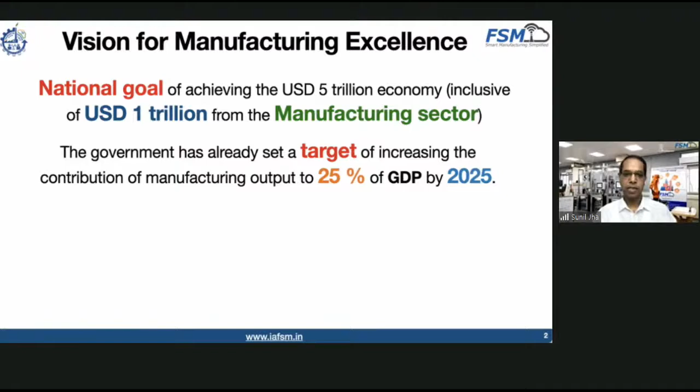Today I will be sharing my thought process on how to prepare technologists for India's smart manufacturing revolution. Before that, I want to give you a quick glimpse of the vision we have for manufacturing excellence. We are looking forward to a $1 trillion USD economy coming through the manufacturing sector, and 25% GDP contribution from manufacturing by 2025. These are some of the visions we have for our country.

We are also looking for India to become a manufacturing hub for the world, and certainly all ministries are working in this direction. There are initiatives by the Department of Heavy Industry to improve the competitiveness of our capital goods sector. We are emphasizing technology development, so that some of the mother technologies can be developed in India. We would like to build up a global value chain, and then skill development as per global standards.

We have already seen a lot of use cases coming out nicely during the pandemic. That's how people got familiar and acquainted with Industry 4.0, and they have already seen the strength and capabilities of remote monitoring, remote access, how facilities become agile, and how they help in changing the product frequently and so on.

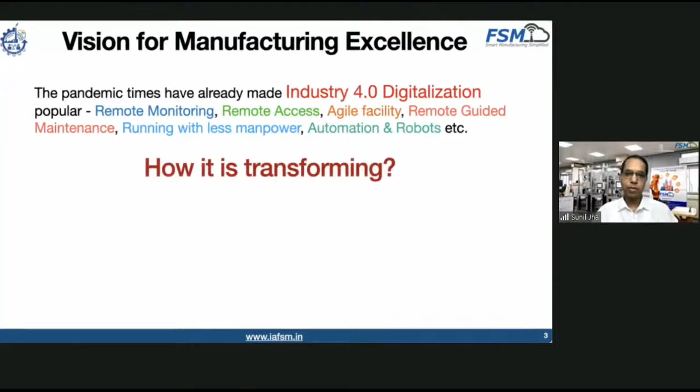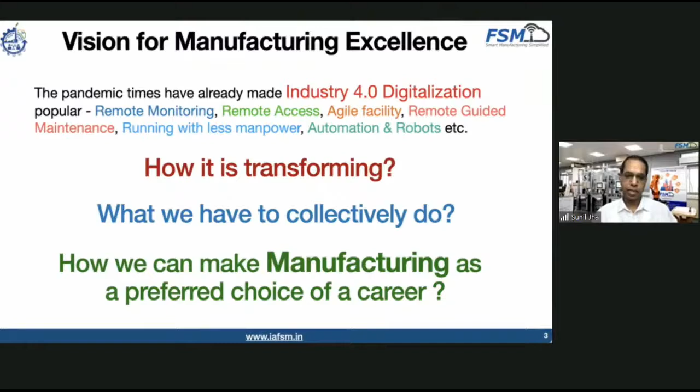Now the question we have today is how it is transforming, and how we are going to contribute towards the transformation happening right now. I want to take you a little back, to when you graduated. We need to see—this is the most important question—how we can make manufacturing a preferred career choice, because we are talking about more technologists contributing towards manufacturing and the kind of vision we have for our country.

Now, since this conference is on the world of technology, we can see that it has no existence without manufacturing. Unless you are able to manufacture something, we will not be able to reap the advantages of technology. But at the same time, we also understand that not many engineers want to opt for a manufacturing career. So I will take you a little back to the way you started learning manufacturing, and then what exactly we need to transform and what kind of reforms we need.

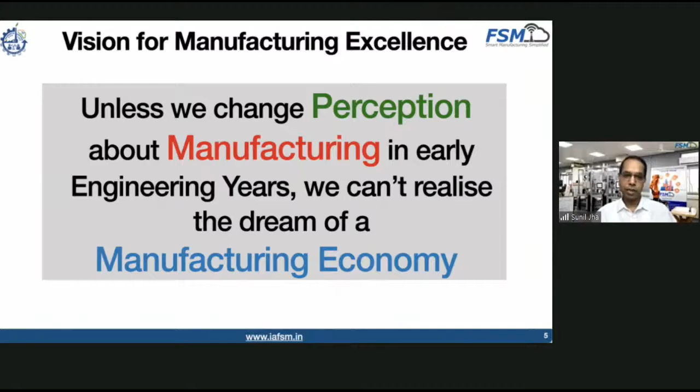Unless we change the perception about manufacturing in the early engineering years—because we all get our first familiarity with manufacturing during our first year of engineering itself—it's very difficult to realize the dreams of a manufacturing economy. So let me take you a little back to where we started our manufacturing understanding journey.

This is the kind of factory in which an engineer got trained, and he got to know about manufacturing processes from these equipments. That's the first interface for all of us, whether as a student, or for me teaching this manufacturing to students for the last 15 years—I think this is something we are using right now. I'm sure you are all familiar with the kind of revolution that has happened over the past. We are using the technologies of Industry 2.0 right now to train engineers to get ready for the revolution we are talking about today.

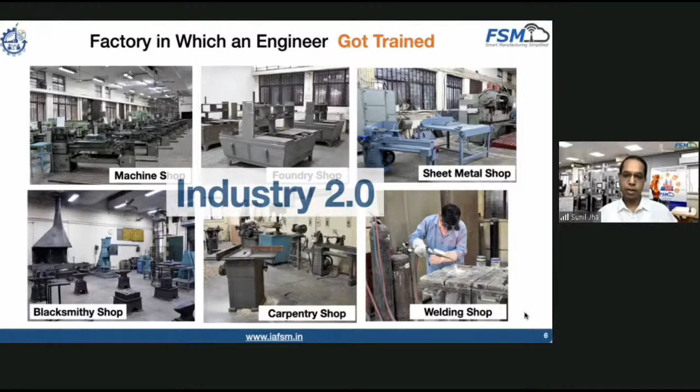So the engineer is supposed to work in this environment. Today, what we are looking forward to, the engineer has to work in this kind of factory—and this is what we are talking about, Industry 4.0. Now, if I am training students on a technology that is Industry 2.0, and we are expecting them to come out and work with technologies relevant for Industry 4.0, I think we need to think about it again.

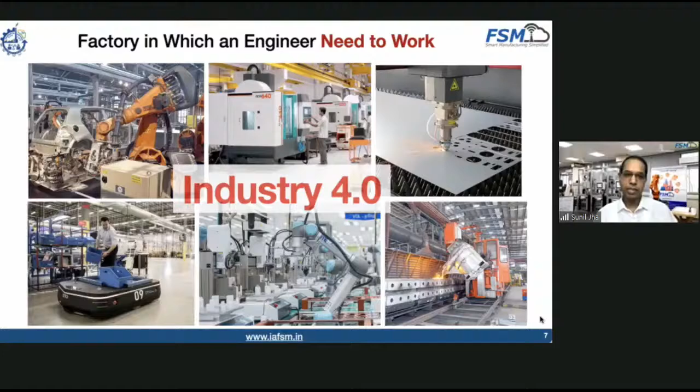So with this, because we are looking forward for manufacturing excellence, we need to do something about this. So that's how we need to redefine manufacturing learning. That's very important. If we are trying to excel in manufacturing, we have to improve the interface for a student, basically how he perceives manufacturing.

From the first year itself, most students have not shown much inclination towards manufacturing activities. That is my experience. Most of the time we heard from students, whether from computer science or electrical engineering, saying why do we need to learn subjects relevant to mechanical engineering? Why is this compulsory learning for all of us?

So this is a very important question to be addressed, because when we're talking about smart manufacturing in the coming years, how can everyone from different disciplines contribute and participate in this revolution?

So here's a quick glimpse of the kind of technologies coming in the domain of manufacturing. This is from a survey done by PwC about digital factories 2020, on how technologies are shaping the future of manufacturing. If you can see, the relevant technologies listed are not primarily falling in the domain of mechanical engineering as such.

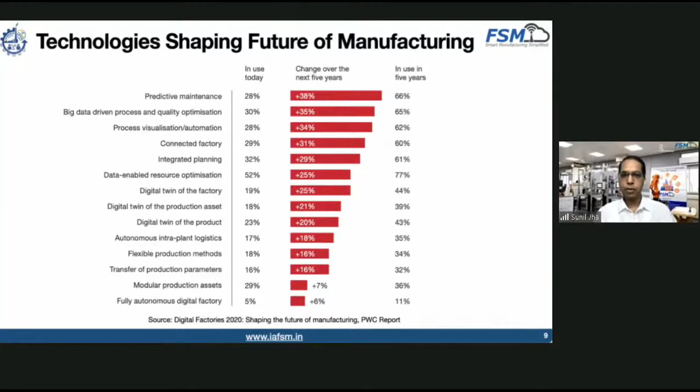So there's a lot of interest to be created among students from different disciplines, so that we can see how these technologies are going to leapfrog in the next 5 years. It's very significant for all of us.

So we are looking forward to the new roles that should be coming out from these new implementations. We are talking about digital enterprises, digital design, digital manufacturing, digital thread, digital products, and the kind of roles coming out are being defined basically.

So with this intent, we started this foundation 3 years back. It's an industry-academia collaboration supported by the Department of Heavy Industry, Government of India. We created this common engineering facility center under a mission from this ministry, the Samarth Udyog, which aims to have more smart advanced manufacturing and transformation hubs set up in the country. We were one of the 4 hubs started in 2017.

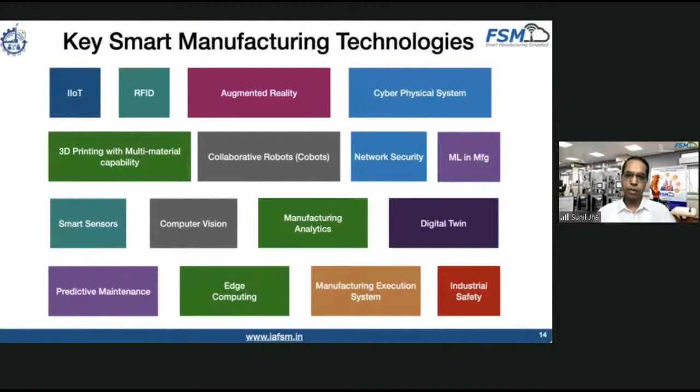Unless students get exposed to these technologies in the early engineering years, they may not come out with a fascination to do something good in manufacturing. So with this intent, we created a small lab, a cyber-physical assembly line. This complete setup has been created in IIT Delhi only.

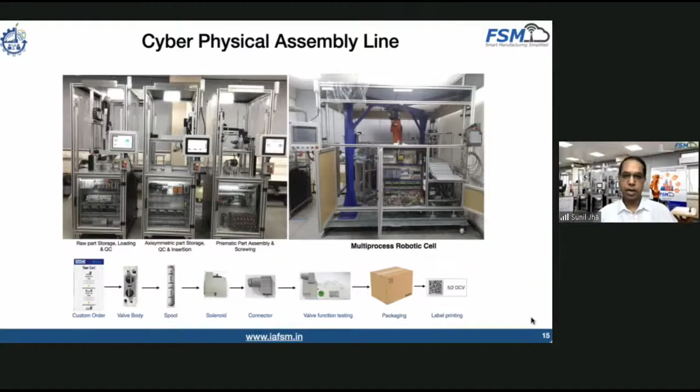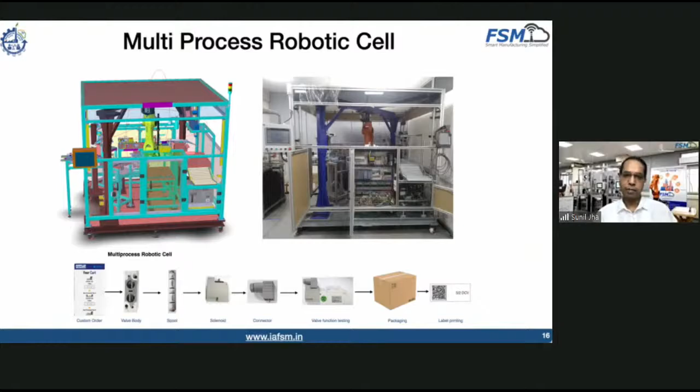We set up an assembly line for an electromechanical valve, which is completely controlled by the cyberspace. We have an app to trigger the order and execute it. We've also supplemented it with a robotic cell, showing how a multi-process robotic cell can perform the complete assembly operation within a small footprint. These are examples created in our lab so students get to know about the state of the art, and can do more experiments and learning on these technologies.

Just in a quick video, I won't run through it in detail due to shortage of time, but I'll give you a quick glimpse of this cell.

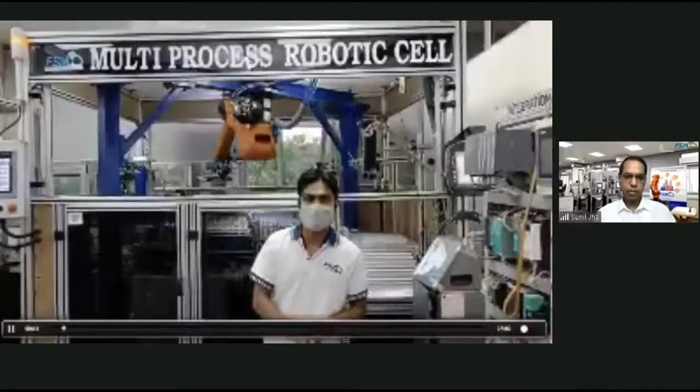Hello everyone, I am Arun, and today I will be explaining this MPRC, that is multi-process robotic cell, which we have created in the lab to get people familiar with robotics technology and how it helps along with automation to do an assembly operation.

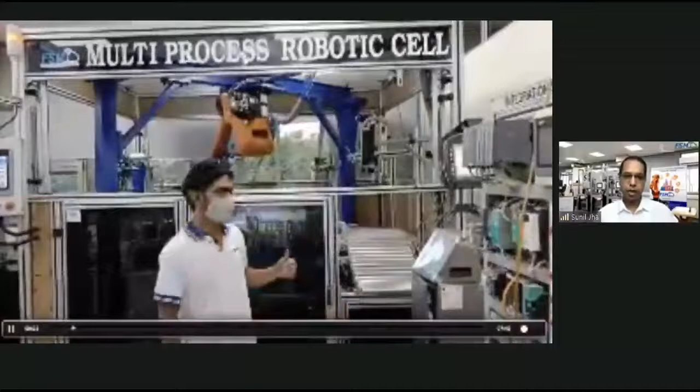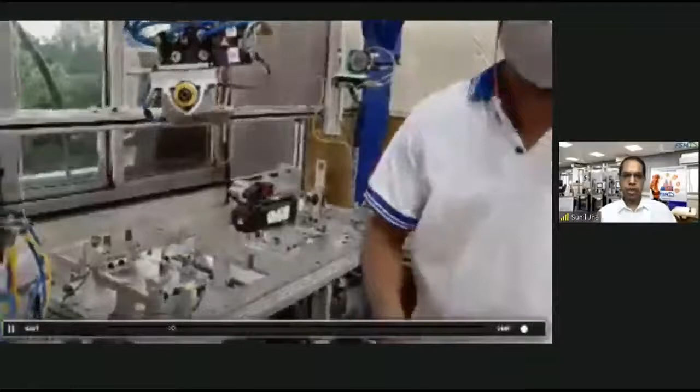The moment you fire an order to this cell, it will start the complete assembly operation. We've shown the interplay of different technologies inside the cell: robotics, automation, packaging, different tool changers, smart sensors, and actuators, how they've been put together to do this assembly operation. This is one of the state-of-the-art facilities we have created here.

I just want to run through a quick demonstration of this. Once the order is picked up or fired by the user, the assembly operations start with the help of the robot at different stations. Finally, the product gets functionally tested, which is a very important part.

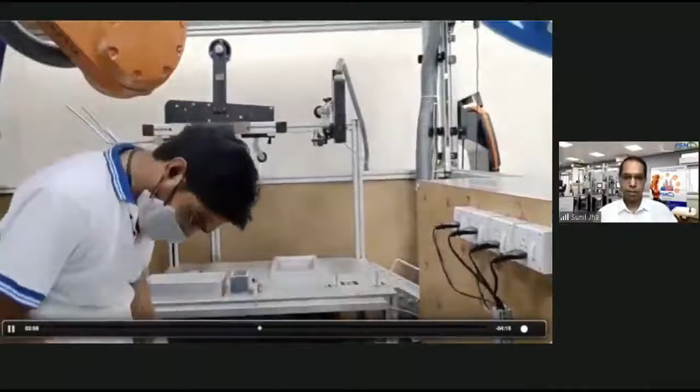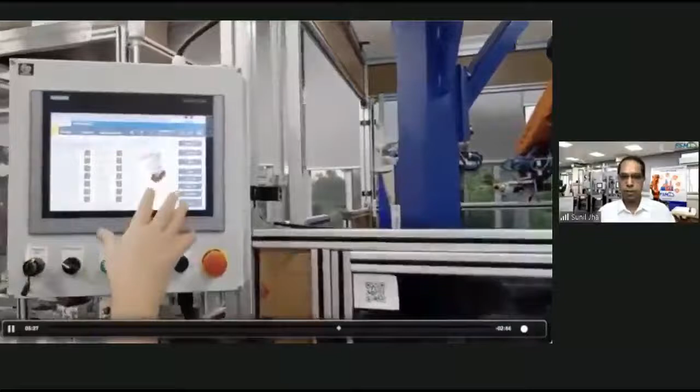This cell will also test the product functionally, and finally the product gets packaged and delivered. That's a very important part of this. We'll be able to do complete programming of this robot along with the automation technologies, which addresses the need for learning.

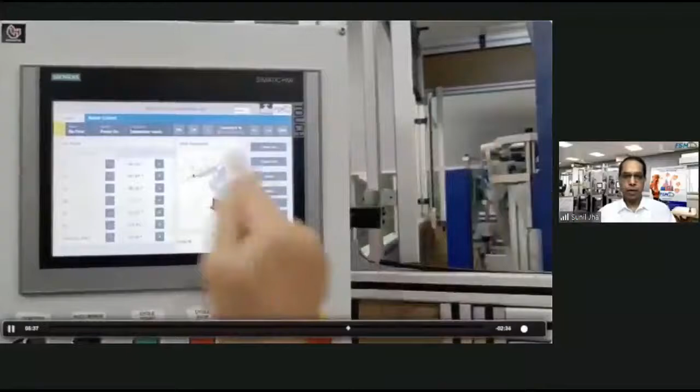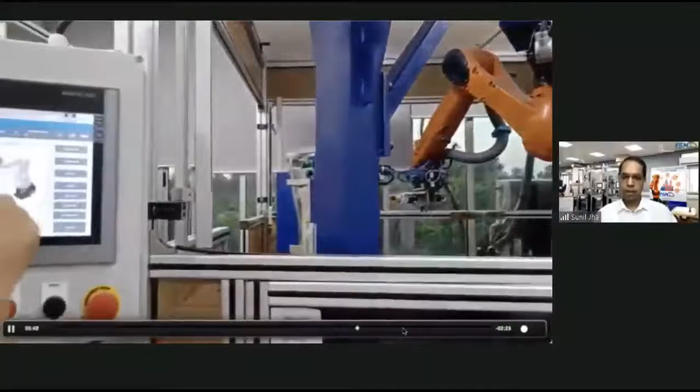If you're supposed to deal with multiple hardware, do you need to learn all the hardware interfaces and programming separately? This is one example where we try to control the motion of the robot with the help of PLCs, programmable logic controllers. This reduces the programming and reprogramming tasks very significantly. That's just one demonstration from the lab.

The next initiative we've taken is to modernize our own central workshop. The kind of factory I showed you, where you learn these technologies, needs to be transformed. So we've decided to do transformation in our central workshop so we have connectivity with various CNC machines and conventional machines as well. We'd like to connect them with an autonomous mobile robot, a collaborative robot for material handling requirements, and also add a state-of-the-art robotic welding cell, some new additions to familiarize students with these developments.

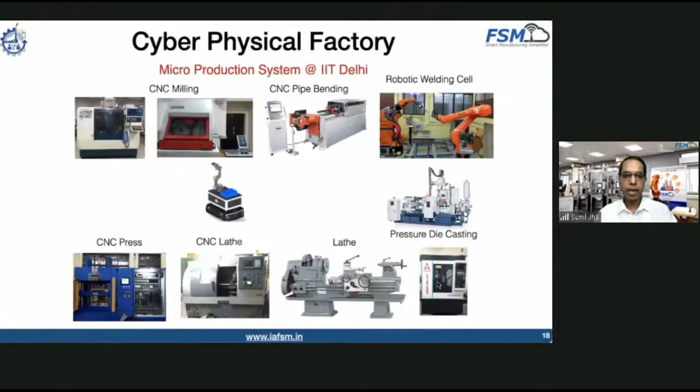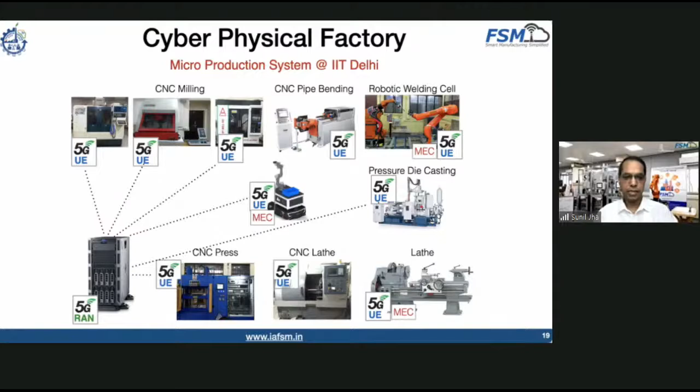We are also working towards integrating this smart factory with 5G. This initiative is ongoing, and we look forward to integrating 5G communication and bringing out more relevant use cases—how high speed, low latency, and highly reliable communication will transform communication in the factory.

Another important aspect when it comes to deployment of these solutions to MSMEs is what kind of application framework we can have, so we're working in that direction too. We're creating application frameworks that can be directly deployed for certain implementations in MSME factories. One such application keeps monitoring the machines and production, and can also communicate with the operator and maintenance people.

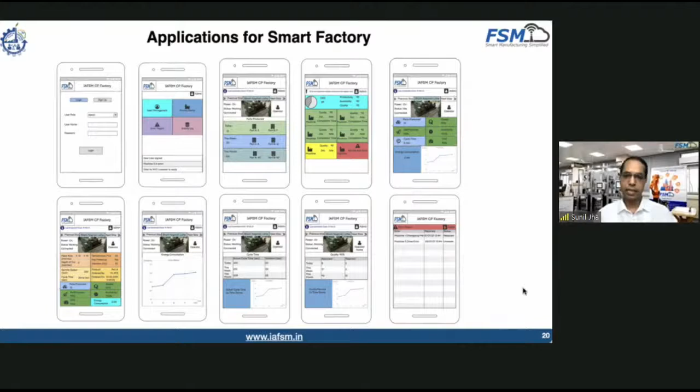The other facility that we have created now is basically the robotic welding cell. This is another concept where we would like to offer the manufacturing facility as a service, because most of the time we realize that we are not running them at 100% OEE, or it's not being utilized because it's specialized for making a certain product. So we are looking forward to such a flexible cell where we will be able to offer it as a service, a kind of resource that is available for anyone to utilize.

We look forward to transform this welding cell with the help of 2 robots to deliver it as a service, where anyone can upload a customized order, and then this cell will keep track of the different data relevant for doing that particular welding operation. It will also have a system for automatic identification as well as the inspection part. So we have designed this complete architecture.

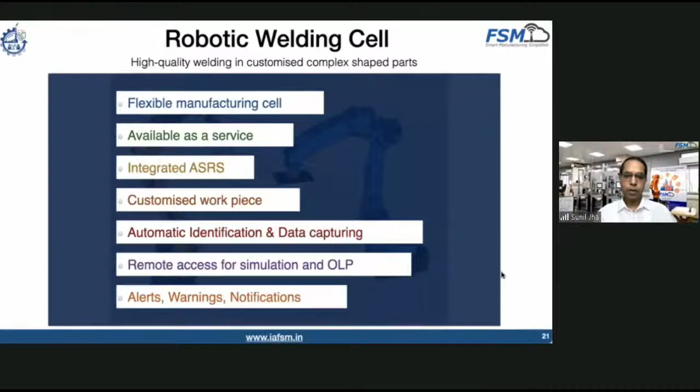Now this kind of exposure is very important for technologists who would like to work in the domain of smart manufacturing. It will not come from just one discipline's learning, and that is what industry is looking forward to. So we would like to generate more interest among students in how they can contribute towards this integration - how to design the architecture, how IIoT can be implemented, how the programming for multiple robots can be handled, and how a master PLC can control the operations in this scenario.

So we have designed this architecture where the customer can upload the required data files to the system, and there would be a local production server which will control the functionality of the cell. The cell will be dealing with 2 robots, so there will be 2 robot controllers, and then there will be a master PLC which will coordinate the motion between the 2 robot controllers.

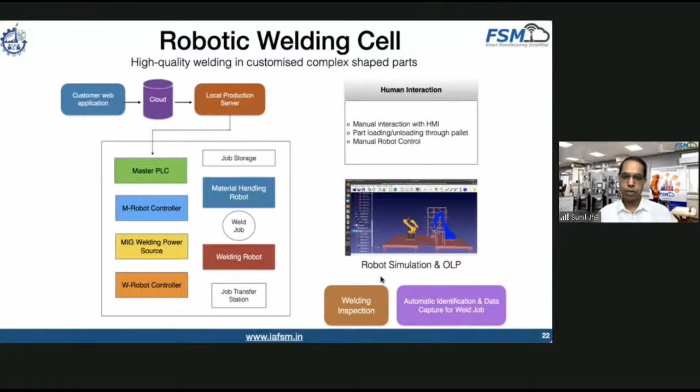We are also looking forward, before the part is delivered, to having an arrangement to do the welding inspection. So this is the welding cell in creation right now. My colleague Rajesh will quickly explain that.

Good evening everyone, my name is Rajesh Bhatt, and we are here at Central Workshop in the Welding Shop. Today I'm here to introduce you to the Robotic Welding Cell project.

This project is actually a smart manufacturing project in which we have demonstrated a flexible manufacturing cell. The idea is basically how students get familiarity with the same technology which is going to be used after 4 years of graduation. So many times it comes as a surprise when they land up on the shop floor and they see that - yeah, we have learned welding by hand only.

We don't have any exposure on how the robot can be controlled, how they can be utilized to do the welding operation. So there are many manufacturing challenges that can be addressed if we get students familiar with these technologies in the early years itself.

So this is one of the cells that we are right now creating. The most important part is how different technologies interact with each other - the welding power source, how the parameters are controlled by the cyber controls that we have, and how these two robots can be put together to do coordinated operations for performing any welding operations. That's an important part here, and I would just like to quickly show you.

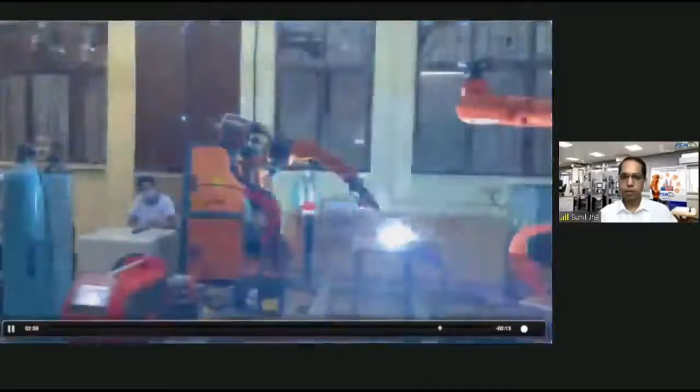Once the user uploads the program, we will also have an intermediate storage within the cell. So the moment the scheduling happens for that particular part, the robot will go and do the welding operation. That's how we are looking at this cell - students can learn how to program the coordination between the two robots, how a particular weld program can be created, and that will then be delivered to this cell for manufacturing.

I would also like to give you a quick glimpse of a training system that's very important, because the state-of-the-art hardware we are talking about, when we normally go to a factory and join a job in manufacturing automation or maintenance for manufacturing equipment, we never encounter this state-of-the-art hardware because we never did a lab truly on this hardware - how to program them, how to interface smart sensors, how the technology interplays between different communication protocols. To give them a quick glimpse of these technologies, we have created this smart manufacturing training lab at IIT Delhi.

So we have a variety of hardware available here to experiment with. This training kit is designed keeping in mind that students will be able to do all sorts of experiments. This facility is not only available for students, even people from industry can come and work on these training kits to prototype their ideas. For example, with IIoT implementation, how different hardware can communicate on different protocols, how data will go to the server - all these experiments can be done with the basic infrastructure we have created in this foundation.

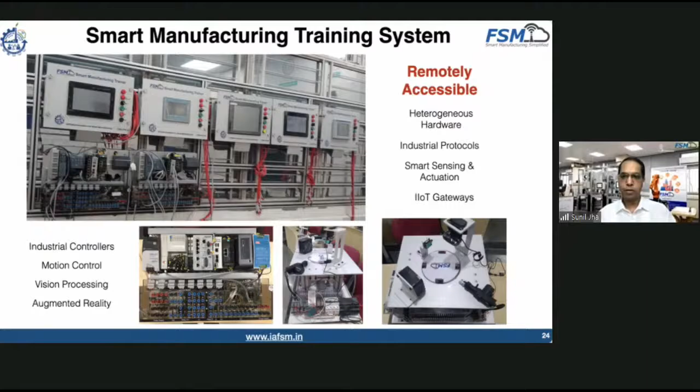The more important point is that we have utilized this facility in the last 1.5 years to train people remotely, because this complete hardware is accessible remotely to train a lot of people. We would like to run this facility 24/7, so if you just book your slot to do an experiment, you will be allowed to do that.

This is just a quick glimpse of the inside of the lab. I will give you a quick glimpse, and two of my colleagues will give you a quick idea as well. I'm not going to run through the complete video, but they will explain the different hardware in the lab.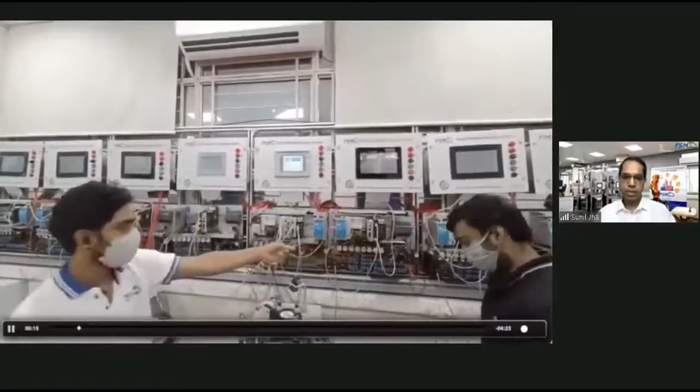They will explain the different controllers, different interfaces for the sensors, and how we can connect them together with the electromechanical system to control the functionality of motion, as well as how data from a vision sensor can be processed. These are the different functionalities.

We have designed a part that can be placed onto this electromechanical platform, and the operation can be triggered - representing almost like a machine processing certain parts. The experiments can be done by interfacing with these controllers, and different environments can be exploited for this learning. That's the learning environment that has been created.

Sometimes we don't always have physical access to this hardware. So if you would like to take this learning to the masses, another aspect we have attempted is AR training kits - augmented reality training kits. This is another application built by us, where people can utilize their mobile devices and tablets to visualize the same hardware.

Whatever hardware we have shown physically in the lab can be visualized in front of their mobile devices, and they will be able to experience the functionality through this augmented view of the same training environment. They can connect with the system, write their own program, and see the results in the simulated environment on this AR application.

We will also be able to monitor the experiments done in this AR environment. It's very important for tracking users, basically whether they are performing the right learning or not. So this is another dimension to the learning that we have planned.

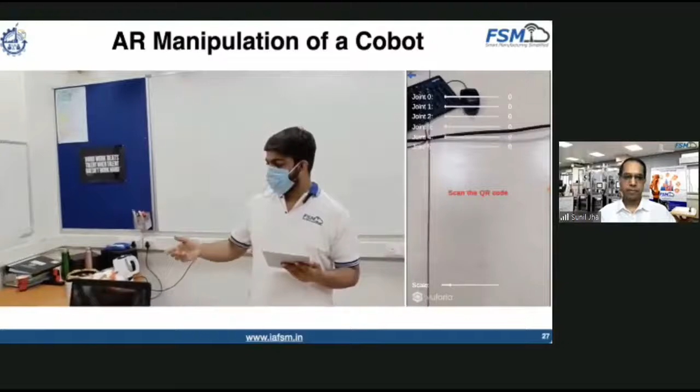So as I have logged in the application, I have a menu and I click on working of cobot. Once the menu appears, it will start the camera, and I need a QR code. Arun, can you please pass me the QR code? So now we have the QR code, and as I move the camera toward the QR code, the cobot will appear.

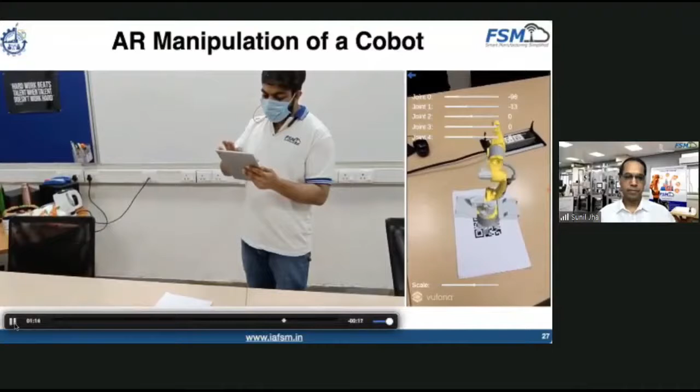So as you can see, the cobot is here, and I have multiple sliders here which I can use to do different functions. For example, I have the scaling slider which can be used to scale the cobot up and down. I can also use the joints displayed here to move the cobot as required. This is a very good way to visualize the cobot without having any physical access to it at this time.

So the idea is this: once we have this interface built in AR, we will be able to control the motion of this cobot also through the programming interface. So this is just a slider shown in this AR, but we would like to control this complete collaborative robot with the help of the programming environment, which is going to control it in the real environment.

Also, at the same time, we can perform the simulation of the pick and place functionality with this collaborative robot, and identify the space in which it's supposed to operate with the help of AR only, before you physically deploy this robot. So these are some of the advantages, and it gives quite an immersive experience to the students to work around these technologies.

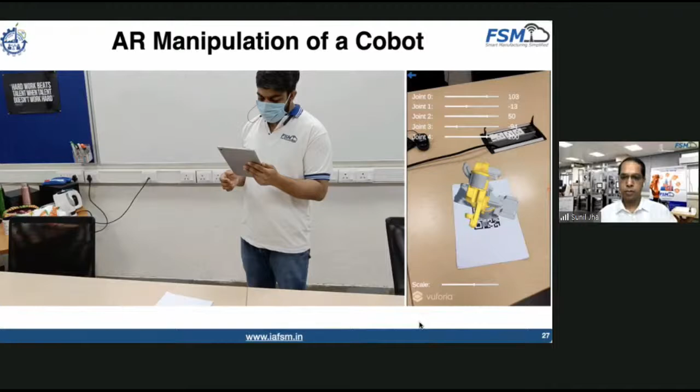We have also built some use cases for real maintenance in our own machines using the same technology. Many times it's very difficult to trace the real problem and then give guidance to the maintenance engineer on how the maintenance can be done.

So on this equipment, we have developed this application where you can scan the identification of a machine, and from there I will be able to retrieve the digital information about this machine. And through IoT, I can come to know about the status of the various sensors.

The data can be superimposed onto the machine itself, and we realize that if the temperature of a motor is not within the acceptable range, it will present you the troubleshooting guide. That way, the maintenance engineer will be interacting live with the whole system, and he will be getting the instructions in front of him only.

And when he decides to replace a particular motor on this equipment, the complete sequence can be made to run through. Many times the instructions given in the labs are not sufficient enough, so a student can utilize the similar technology and interfaces to explore the systems further.

So this is another dimension, and we will also be using the same applications on the shop floor. Industry can do a lot of experimentation with these technologies to see how they can reduce maintenance time. First of all, to identify the problem, that can be attempted with the help of the analysis of the

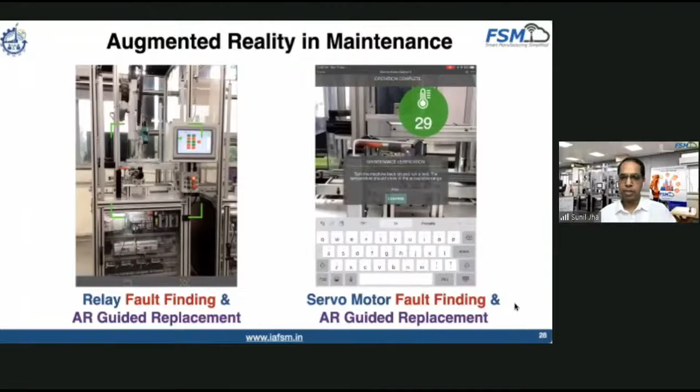IoT data stream. And after that, once you identify the problem is in a particular component, you can guide an operator or the maintenance engineer to perform that operation, and you will capture the data of who did this maintenance activity. So all these technologies are basically at the forefront of Industry 4.0 implementation, and in this facility our intent is to give the same exposure to people from industry as well as students to learn on.

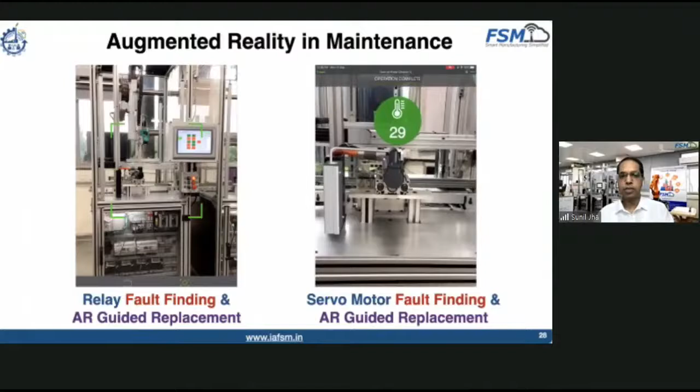The other interface we have worked on right now is deploying this autonomous mobile robot in our workshop, because I would like to bring out the same environment which is going to be used in the industry we are talking about.

In this case, we are attempting the coordination and communication between the two robots over here. One is the autonomous mobile robot, another is the collaborative robot that is placed on top of it. So how you can do material handling within the different shops of the workshop.

Material can be inspected with the onboard camera on this collaborative robot, and then the material is transported to another location. So this is the application where it can do the pick and place.

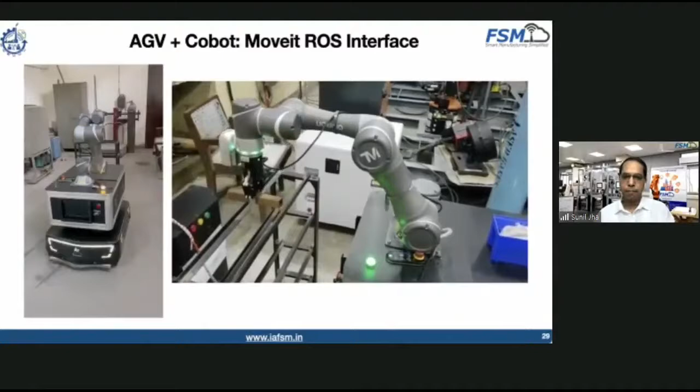The important part is that the two industrial controllers are now being interfaced with the open source Robot Operating System, and we will be utilizing ROS to communicate between the two different industrial controllers, because through that it will imbibe a lot of learning and give us more flexibility to control the different operations.

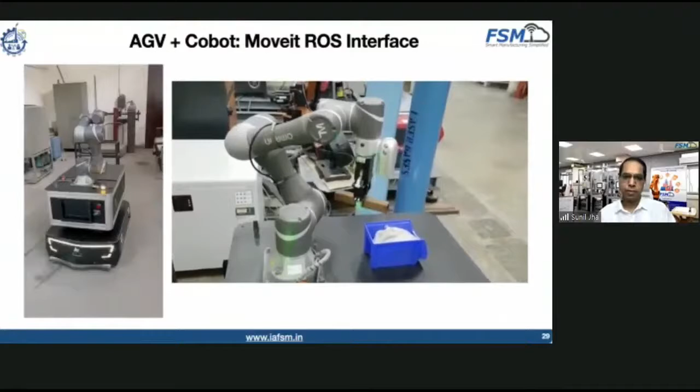So these are the functionalities being developed. It's a kind of research that we are doing in these areas, but at the same time it will also expose the students and people from industry to understand how this technology can operate.

This is programming done by the people in the lab, who control this collaborative robot completely from the ROS environment. They set up the goal of where the robot should move and what the final destination is.

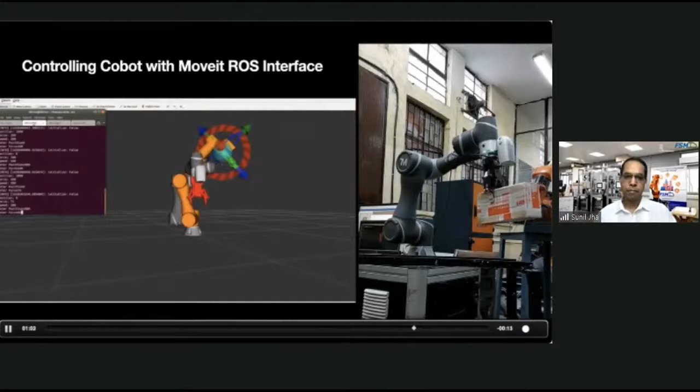The complete path planning is done by the ROS library using MoveIt. The motion you see physically is also done in the simulation. The advantage of ROS is that we need not change the programming for simulation versus physical system control—it's the same environment, so you can check in simulation and then deploy it.

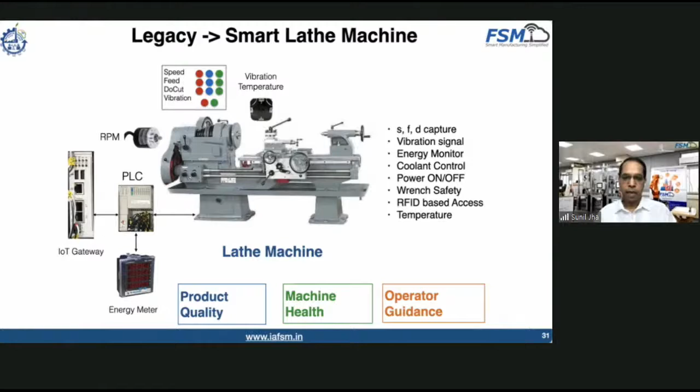The other development we are doing is to transform the lathe, one of the equipment most of you deal with in the workshop. How can we make it smart so that we produce the right product quality, monitor machine health, and give guidance to the operator? Many times when you do the job, you end up with a very poor surface finish, so this helps you control those parameters.

This is one of the deployments done in the workshop, as my colleague is explaining. We have integrated sensors and a controller with this lathe, which is a conventional old machine. We want to monitor different parameters so we can guide the operator.

The right cutting conditions can be maintained—it will guide you if you are not maintaining the right depth of cut or feed rate, indicating when you go beyond the range, so you can adjust those conditions to get good output. We also monitor the energy consumption.

We have also implemented some safety measures in this smart lathe machine. If you are not meeting certain interlocks, you will not be able to run the chuck—that's a very important part of the safety.

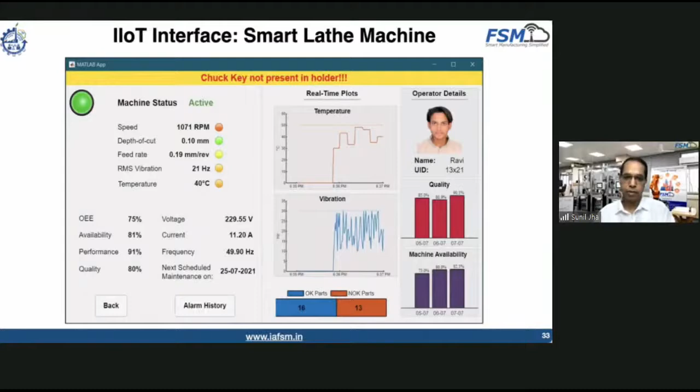We have also created an IIoT interface for this lathe machine, which is useful for smart factory implementation. Once students get familiarity with this, we want to give them exposure to how this technology can help improve productivity, produce the right quality parts, and monitor different maintenance parameters. I think that's a very good exposure to build on.

In this short span, I gave you a quick glimpse of how basic technology learning can happen with this kind of implementation. Our idea is to have an action plan to modernize basic manufacturing learning. This is important because we have a lot of expectations from manufacturing—we are looking for India to become a manufacturing hub in the world. We have to improve basic manufacturing learning, and it starts with the basic infrastructure.

We have to update the manufacturing curricula. Certainly the basics are very important to learn, but we also need to get acquainted with the state of the art—what is being deployed in the world—and how it can help our own industry become more competitive.

Finally, we should bring more open problems to our young minds to solve these manufacturing issues. They are very innovative—now a computer science person can also find a connection with manufacturing, applying machine learning algorithms for predictive maintenance. There's a computer vision problem to address, with multiple sensors and controllers involved in manufacturing. This will bring a lot of interest to people learning manufacturing, and they can opt for a manufacturing career with this development.

That's all from my side. Thanks—we are looking forward to all your support to strengthen this development we are doing right now, so that we can bring out more technologists to support this industrial revolution for India. Thank you so much.

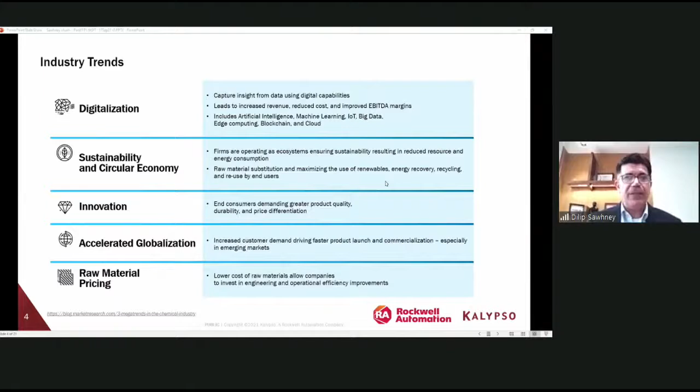And all of it is being enabled by these digital technologies, the foundation of which is data. That's going to be the aspect that I'm going to be exploring with you all today. So moving on, if what we are talking about is data, all of us have been hearing about data being the new oil, or whichever version of that parallel you've heard about.

I want to spend a minute to explore this with you. Of course, data is very important. Of course, fact-based decision-making is something we've been practicing in organizations for decades. That's the reason you have hierarchies of management, who believe they're acting on precise information and insights coming from various parts of their business and enterprise. But if you really analyze, even in organizations with enterprise-wide business systems today, what really happens is business leaders at multiple levels are making decisions.

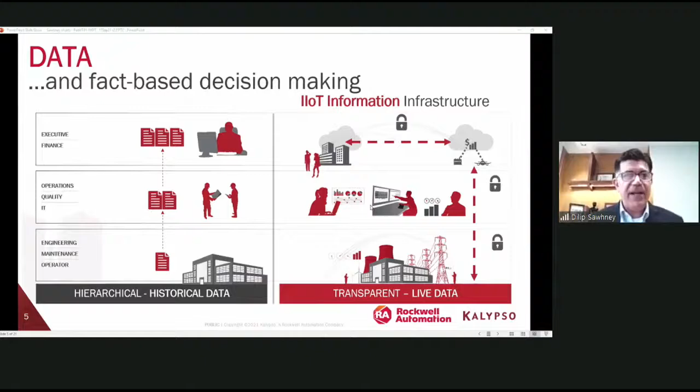And I'll move on. So today, Dr. Jha spoke about a set of use cases which are very common. I'm going to explore another end of the industry, which is more process oriented, just to throw in some diversity for this audience. Now, what does digital mean to industry, particularly process-heavy industries at large? I think it's very important for us to demystify and take the jargon out, and there are a few aspects I'll try to explore with you in the available time today.

I'd like to begin by stating that the world we live in is an analog world. All of the things that happen around us are analog things. That's how even processes and plants function. That's how machines function, it's analog. Our own perception of the world is also very analog.

It's not that you say, a light is on or off, that's digital, but you know what I'm saying. It's not that you see something in an on-off state. But at the same time, when you bring in the impact of digital technologies, which I'll dive deeper into, digital offers a very new way for us to visualize and analyze the world, opening up several new lenses and new vistas, which enriches your experience and augments your capabilities to make better decisions faster. That's what is at the core of this. So I would say that even if the world around us is analog, we are now living in the digital-analog world simultaneously.

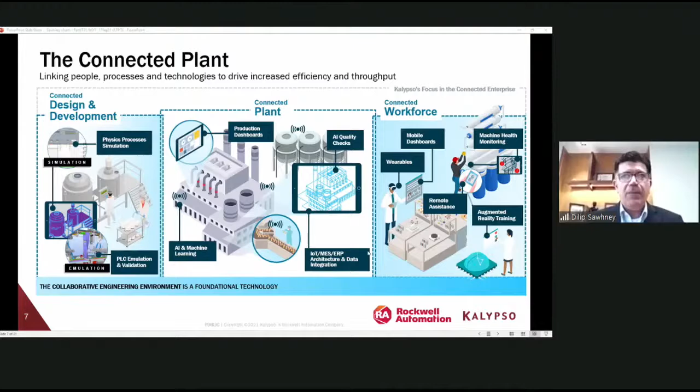The reason for that is you not only have to improve technology, but at the same time, you've got to be improving processes, and you also have to create an impact on your workforce, which is of an even scale. So it's technology, processes, and people, and then you have to really have an end-to-end view of your organization, all the way from design to where you manufacture inside your plant, and of course taking into account the workforce elements. And when you reimagine all three aspects of this under the people, processes, and technology dimensions in the digital realm, and if you're able to actually imagine a future state, that's when you're able to really create a game-changing impact in your business. And those are some of the things that we'll talk about today.

You discover, which could be a rough surrogate for R&D or whatever else, and then you actually create. You may be creating it in the digital realm. And then you make, that's manufacturing, and then you eventually sell, and that's your supply chain, etc. Now, if you have a common seamless flow of data that interconnects all 4 parts of this, that's your entire enterprise, that's the digital thread. And that enables you to have the kind of impact that we've been talking about.

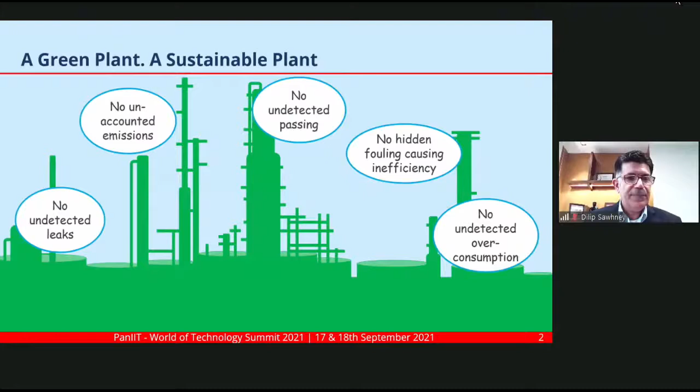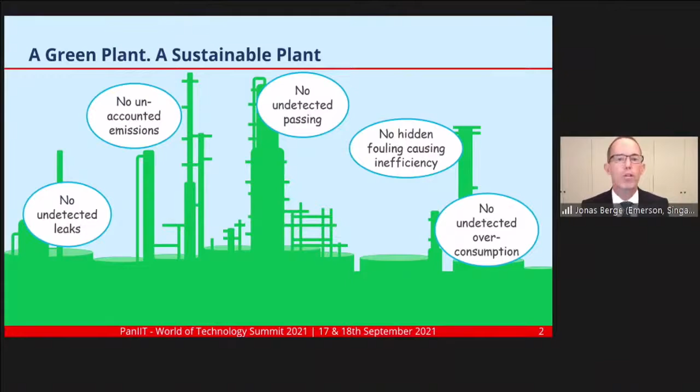Imagine a green plant, a sustainable plant with no undetected leaks, no unaccounted emissions, no undetected passing, no hidden fouling causing inefficiency, and no undetected overconsumption. That is really the vision of sustainability and digital transformation in plants.

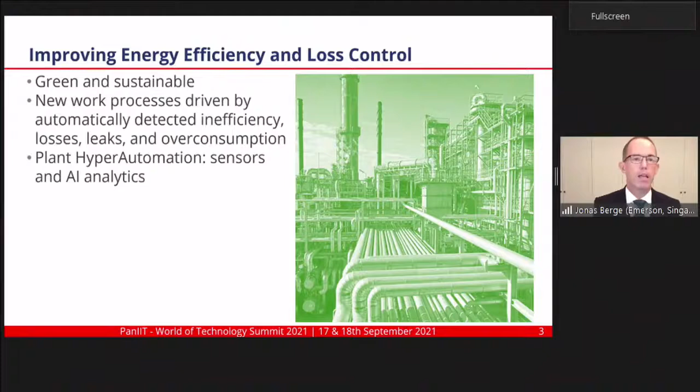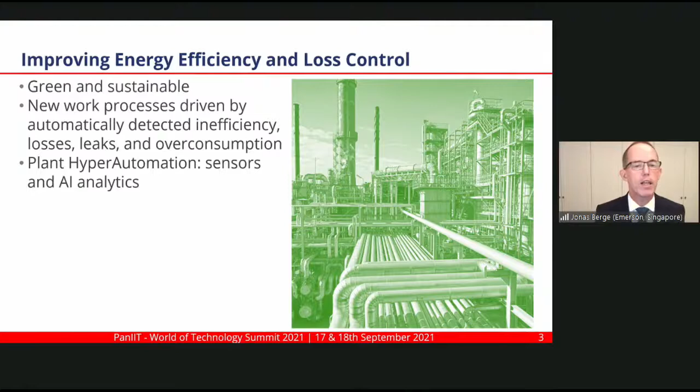So today I'll speak about three things. First, why plants are changing, because they want to become greener and more sustainable. Then I'm going to talk about how plants are changing through new work processes driven by automatically detecting inefficiency, losses, leaks, and overconsumption. Lastly, I'm going to talk about what plants are changing: they are adding automation, really towards hyper-automation, including sensors and artificial intelligence analytics. So I'm really going to talk about the why, the how, and the what.

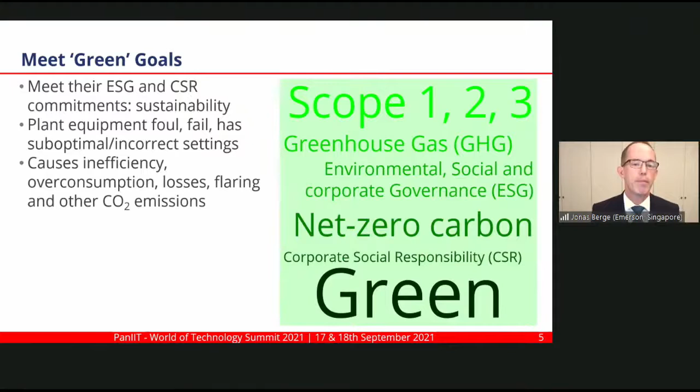I'm going to start with why plants are changing. They want to become more green, to meet their ESG and CSR commitments, which include sustainability. Yet plant equipment fouls, it fails, it has suboptimal or incorrect settings, and so on. This causes inefficiency, overconsumption, losses, flaring, and other CO2 emissions. So this is why plants want to change.

So how do plants change? Well, Industry 4.0 or the Fourth Industrial Revolution, digital transformation, digitalization, or industrial Internet of Things, IIoT, whatever you prefer to call it - that includes work practices that help multiple domains, for improved reliability, greater sustainability, making the plant a safer place to work, and reduced off-spec product.

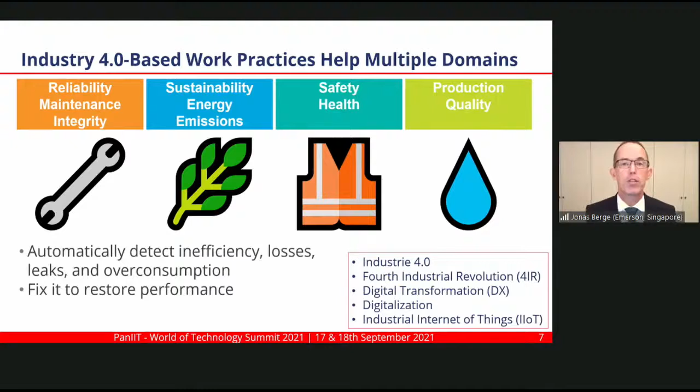But today the focus is on the sustainability part of it. And that's really enabled by automatic detection of inefficiency, losses, leaks, and overconsumption, and so on. That enables plants to quickly fix it and restore plant performance, to reduce their energy consumption and thereby being sustainable. So what do plants need to do to achieve this?

Well, they need to add in more automation. Until now, plants have been driven very much based on reports, with KPIs. Reports and KPIs tend to be lagging - end of the day, end of the week, that sort of thing. But to become more proactive and respond, they need to have real-time dashboards with real-time indexes that tell them what's going on in the plant.

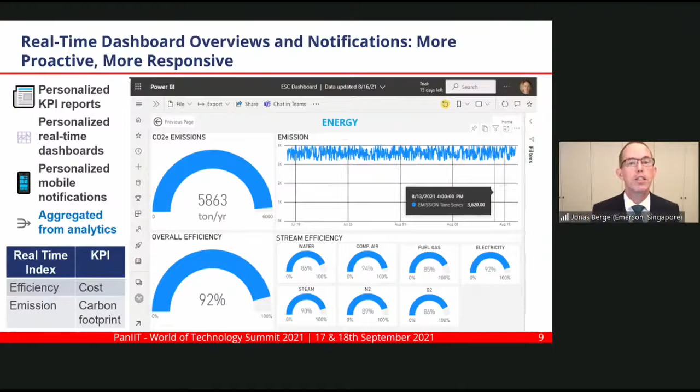They get that on real-time dashboards, which are personalized. So for instance, if you are involved in sustainability, then you would have oxygen or whatever utilities you are using in your process. All of this information in the dashboard comes from underlying analytics - it could be from energy management information systems, performance monitoring analytics, condition monitoring analytics, and emissions monitoring analytics, for instance.

So manual energy management is very time consuming, and it's also lagging, as in manually reading flow meters, etc. Metering at plant battery limits or at the source, like as these utilities cross into the plant or coming out of the boiler or compressor - that is insufficient. You need in-depth data and analysis of how energy flows throughout the plant.

This enables cost accounting, which drives consumption accountability. It allows you to detect and pinpoint overconsumption, to restore plant performance. It gives you automatic reports and dashboards, automatically. So now you become more productive, but also more responsive and proactive. And it allows mass balance and energy balance, so you can pinpoint leaks, which drives repair. So that's really how plants have now become more sustainable.

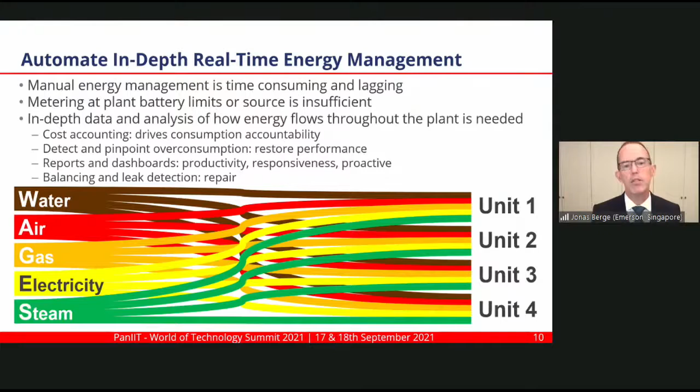So they are tracking these utilities as they come in across to the plant or out of production, and as they go into the various plant areas and units and so on. This is done through an energy management information system, or EMIS. An EMIS system has a software portion and a hardware portion. Everything is really built on top of the hardware platform, which is mostly like flow meters and electricity meters. What the software portion does is what you see right here.

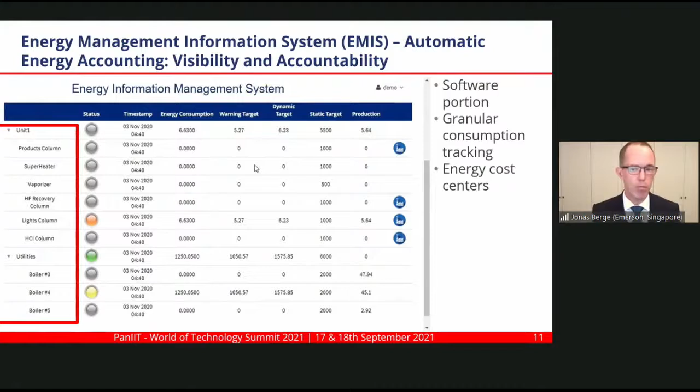It provides that granular consumption tracking. So you see what the consumption is, not only for the plant as a whole, but in individual units or areas, and even down to individual pieces of equipment - maybe not all, but at least all of the major consumers. Now you can see where energy is going, and there are energy cost centers accordingly, which drives more responsible use of energy in the plant.

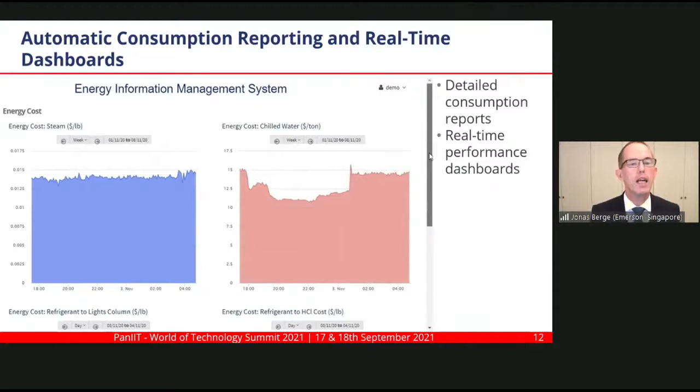The EMIS also provides detailed consumption reports, so you don't have to manually gather all of the data - it's generated automatically, along with automatically generated performance dashboards. So you can see up to the minute what's happening in the plant.

Perhaps most interesting is that the EMIS also dynamically computes energy targets based on the production rate, using an internal model. So let's say you're a refinery and right now you're running at 250,000 barrels per day - that's your production rate. Well, based on that, the model then calculates what should be the consumption of water, air, gas, electricity, steam, and other utilities.

And then it compares that against the actual measured consumption. So if you have overconsumption, that triggers an alarm, and it pinpoints where in the plant this is happening and which utility it is happening to. Now you can dispatch a troubleshooting team to fix that, to find out why it's over consuming that particular utility at that particular place, and do something about it.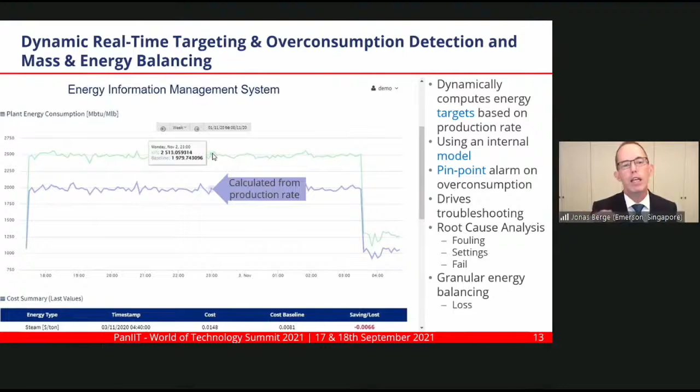The software then also provides root cause analysis. It tells you, is it fouling of heat transfer surfaces, or inefficient combustion? Is something broken, or is there something running that really should have been turned off? And lastly, there's granular energy and mass balancing. So if there's a leak somewhere in the system, maybe in a piping system underground, you can more closely pinpoint where this is occurring.

Now, the model used in the EMIS to compute the target, that's a good example of artificial intelligence. In the case of well-known unit processes, it uses models based on first principles, because many unit processes are already well understood and documented. So that just goes straight into the AI model. But there might also be not-so-well-known processes in the plant.

In that case, you can use machine learning to extract knowledge from process data, using regression analysis or principal component analysis. You extract that knowledge, those correlations, and build a model based on that. But you need a lot of data to do this, and then these models are used for the targeting.

Well, all of these EMIS functions I've been talking about are really built on top of sub-metering. Because metering only at the plant battery limits, or as steam comes out of the boiler or out of the compressor, that is not sufficient. You need sub-metering at area, unit, and equipment level.

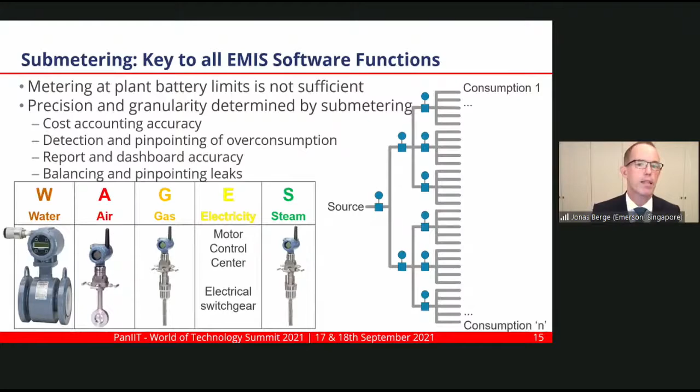Sub-metering really determines the precision and granularity of the EMIS functions, like the accuracy of cost and accounting, the precision with which overconsumption is pinpointed to a particular part of the plant, the accuracy of the reporting and dashboards, and again the precision of how leaks are pinpointed to a particular place within the plant. So sub-metering is very important.

There's some confusion sometimes about the terminology used around all of this. Sometimes artificial intelligence, machine learning, and neural networks might be used interchangeably, but they're not exactly the same. Artificial intelligence is the broader term, and under it there are two branches: engineered analytics and data science. By engineered analytics, I mean, for example, pre-programmed, rule-based analytics.

That may include, for instance, using cause and effect, which is really the best way to do condition monitoring of equipment like pumps, compressors, turbines, etc. And it includes first principles, such as thermodynamics, which is the best way of doing performance monitoring of heat exchangers, cooling towers, and so on. In fact, a majority of use cases in a plant really use such engineered analytics.

But there is also use of data science, of course. Data science again has two branches: machine learning and deep learning. Machine learning includes regression, principal component analysis, support vector machine, artificial neural networks, etc. And that's really best used when the cause and effect or the first principles of something are not well known.

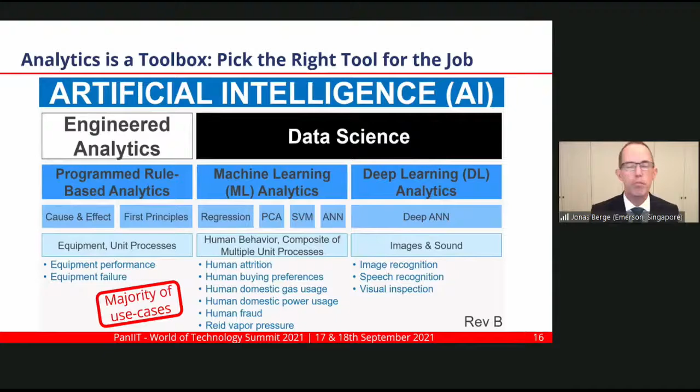Lastly, deep learning is more for audio and video type of analytics. So analytics is a toolbox, right? The hammer is not the right tool for everything. Similarly, in analytics, you need to use the right tool for the job. It could be a hammer, it could be a spanner, it could be a screwdriver. You get the analogy.

Anyway, so today a lot of things in the plant are still done manually. It's only the core process control which is really automatic. For example, to monitor steam traps, that's very manual, through manual surveys, usually done yearly, okay?

Since it's yearly, that means a steam trap can be blowing steam for 6 months to a year, costing you lots of money in loss of steam and increasing your carbon footprint. Another way it can fail is trapping condensate, and that causes inefficiency and can lead to a whole host of other problems. So either way, this needs to be detected fast.

So plants are putting in sensors like the one you see on top right. It sends acoustic noise and temperature data to the analytics that then tells you the health of the steam trap, and tells you if it's failed blowing steam or trapping condensate. So it's descriptive analytics, not just telling you it failed or there's an anomaly. Now you know that you need to replace the steam trap, so it's prescriptive analytics.

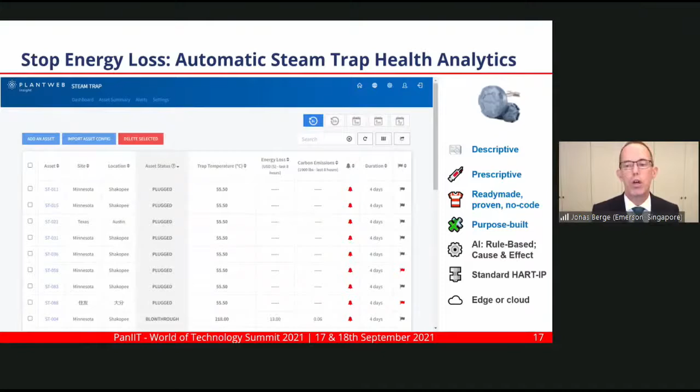And all of this analytics is ready-made. It's tested and proven in many other sites. You don't have to do any coding, you don't have to do the testing or pilots. It's ready to be deployed. And this is not general purpose analytics, it's purpose built for this job, with lots of built-in subject matter expertise that allows this analytics to do a really good job.

Similarly, relief valves are manually inspected today, maybe yearly. So plants put in automation for this, the sensor and the analytics. Sensor is not enough, analytics is not enough, you need both. So now if the relief valve is releasing, you get a precise timestamp of that, and you can correlate it to process events and make changes to prevent releases in the future.

Worst case, if the relief valve is stuck open, you get to see that too. But even if the relief valve is not releasing, it could have seated back after a release and it's not shutting tightly - there's a small leak, but that small leak at the seat over time, weeks, months, years, causes great losses. So you're able to detect this as well, and you can send that relief valve for overhaul to stop product losses.

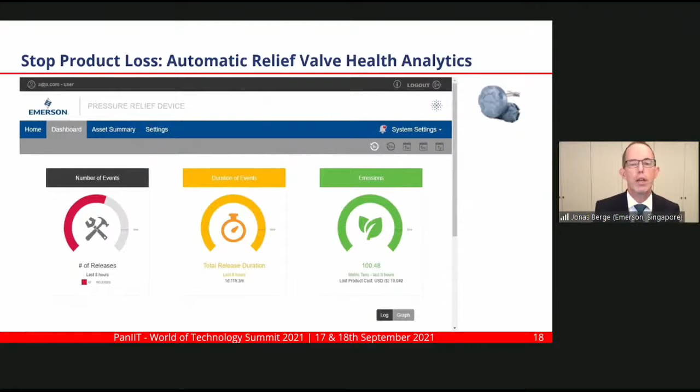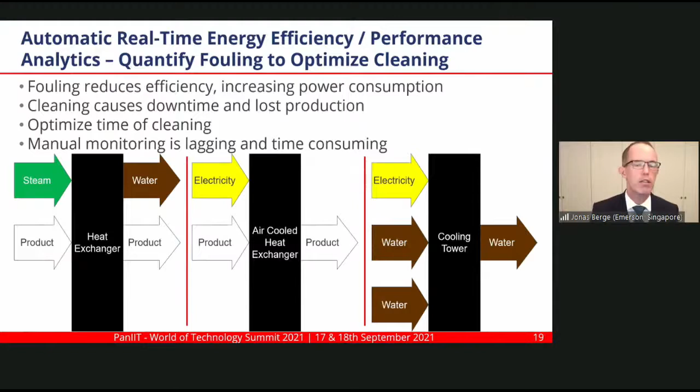Efficiency - fouling reduces equipment efficiency, which increases power consumption because the equipment needs to work harder. Of course you can clean the equipment, but that means downtime and lost production, so that's also not good. So really what you've got to do is optimize the time when you clean the equipment. Manual monitoring to figure this out is time consuming, lagging, and generally difficult to do, so not an effective solution.

So plants are now automating this - they put in additional sensors and software. With that, you can tell what fouling is happening inside, let's say, the heat exchanger, because you have the fouling factor there. So based on that, you know whether you need to clean the heat exchanger today, or can wait until the next turnaround, or do it sometime in between when convenient. And if the heat exchanger has multiple bundles, a bank of multiple bundles, it pinpoints which bundle you need to clean, so you can bypass and clean just that bundle rather than the entire heat exchanger.

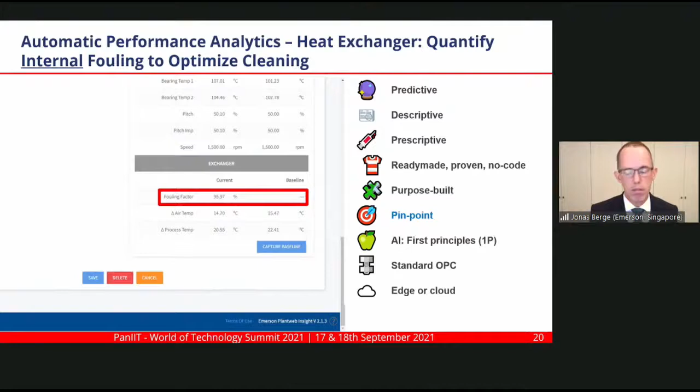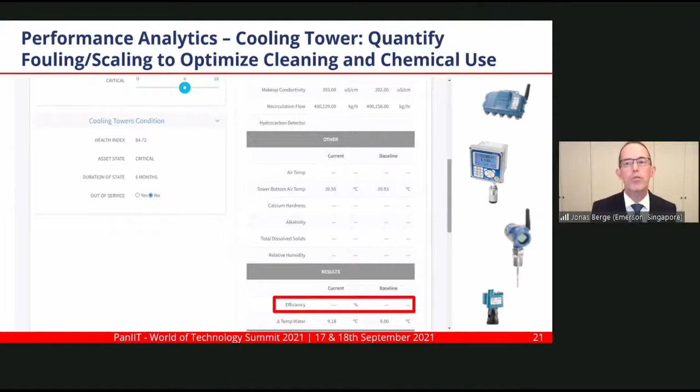A good solution. Similarly for cooling towers, additional sensors help you optimize based on the efficiency, tell you when to do the cleaning of the filler, or if you need to replace the filler, and also allow you to optimize the anti-fouling chemical injection - all to stay as sustainable as possible.

And lastly, another example, air-cooled heat exchanger - I think you get it - additional sensors and software. If you have an air-cooled heat exchanger, or fin fan as it's called, with multiple cells, it tells you precisely which cell is fouling and needs cleaning up.

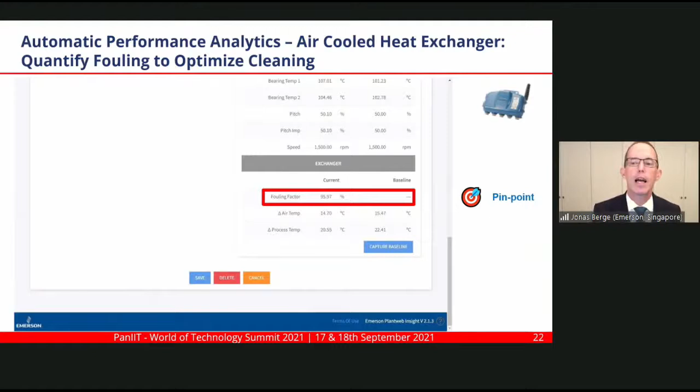Well, so the focus today is really on sustainability, but I cannot not mention a few words about the decarbonization megatrend which we are embarking on, because now we're building a lot of new plants for this new hydrogen economy. And if you look across the hydrogen and ammonia value chains, there are lots of plants, and they are relatively small. By that, I mean, if you look at a coal-fired thermal power plant, those can be hundreds of megawatts, 1,000 megawatts or more.

If you look at these hydrogen plants, they're typically tens of megawatts, so you need tens or a hundred times more little plants in this economy. Now, if you need a pool of engineers and operators in every plant, that would be impractical, right? So with this economy, we're going for remote and autonomous operation with fleet management.

You have a fleet management center that monitors multiple little plants, maybe throughout India, managed from Bangalore, but really it could be across the globe, managed from a single location.

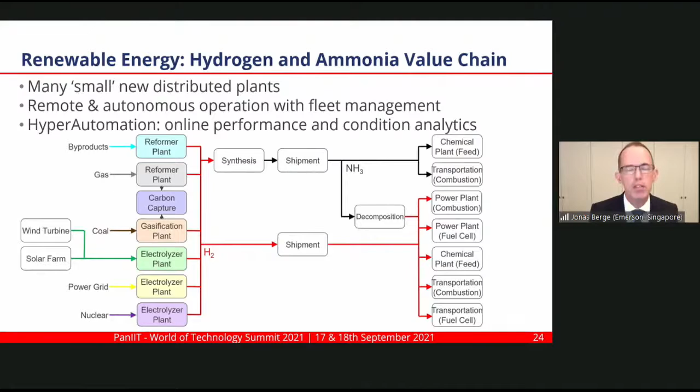Now, if you don't have people in the plant, you really need to know well in advance if equipment is not performing or if there's a risk of failure, so you can send people there. Because people are not there, it's autonomous, unmanned. And you don't want to send people on a periodic basis just in case, you want to send people when you really need to. That's again the importance of having sensors and analytics in these plants.

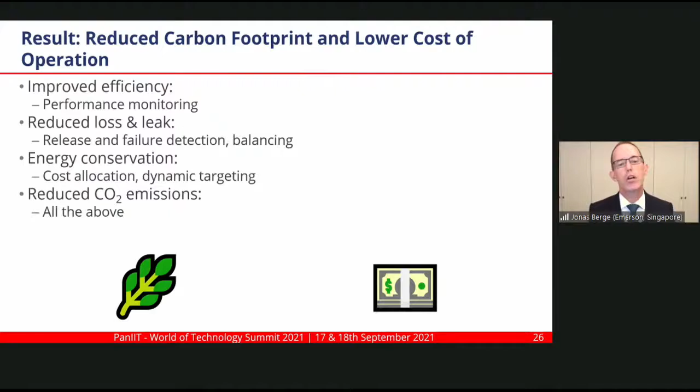So, in conclusion, with these solutions, plants get improved efficiency thanks to performance monitoring. They reduce their losses and leaks thanks to release and failure detection and energy balancing, mass balancing. You see energy conservation because cost allocation and dynamic targeting drives more responsible behavior, and they see reduced carbon emissions, thanks to all of the above.

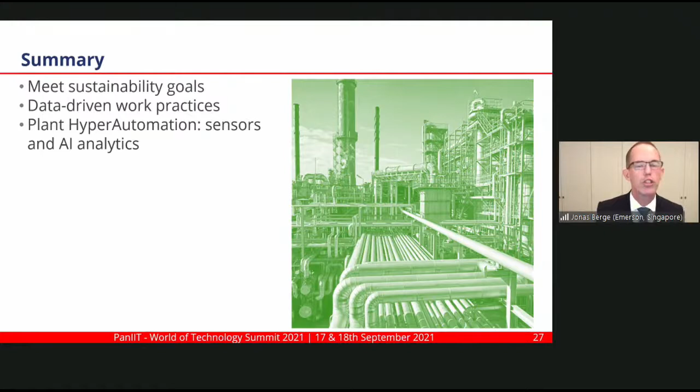So in summary, I spoke about three things. First, why plants change: because they want to meet their sustainability goals. Then how plants change: through new data-driven ways of working. And lastly, what plants are changing: they are deploying additional automation, towards hyper-automation if you will, with additional sensors and artificial intelligence analytics.